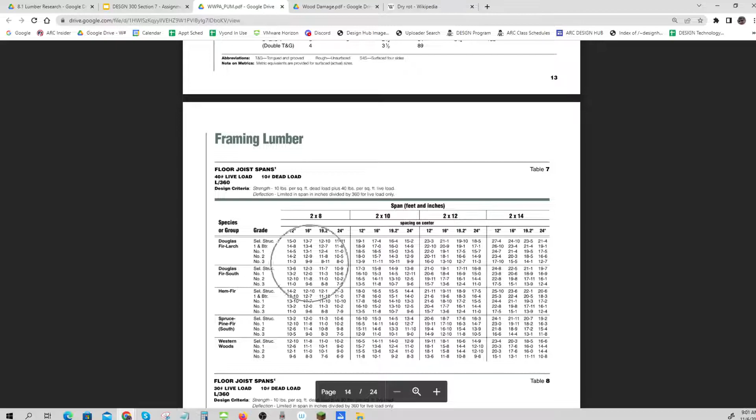Here's some mechanical properties that help answer a question, but there's even more information about this. And here are some charts. So this is the strength of the lumber. And then there's all these adjustments and this and that that we're not going to get into. We're not going to look at all this. But here are some, again, some framing lumber, timbers, more about that. Here's joists. Okay, so there's a lot in this product use manual.

There are some quicker ways to get to it. This lumber design values tells you, it's pulled out from there and it tells you what some of those things are about. Dimension lumber by species. This tells you about each different species and what it looks like when you're looking at dimension lumber and what some of those splits and things look like. It's really, really good knowledge.

And then there's lumber sizes if you're interested in just knowing how big things are. And that's really important because when you say a 2x4, it's not 2 inches by 4 inches. It's milled to 1.5 by 3.5. Okay, and you can see that these ones are basically 1/2 inch smaller up through 6. So 2, 3, 4, 6 are generally 1/2, and then the 8s are 3/4, 10s are 3/4, and 12s are 3/4 smaller.

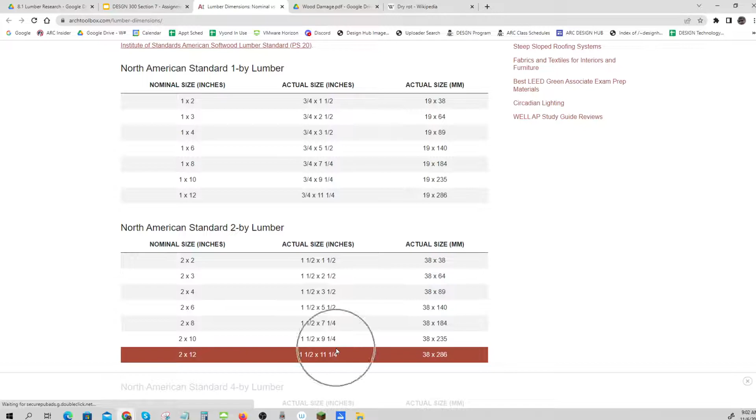Okay, so there's a little bit about what you're going to do in here. And again, we're going to add images. Now, here's an interesting one: summarize the important strength properties. So you're going to want to read about those in the strength portion and just make a quick summary. You know, it's a page and a half, 2-3 pages long, and I'm looking for you to condense that and pick out the key components we're going to look at.

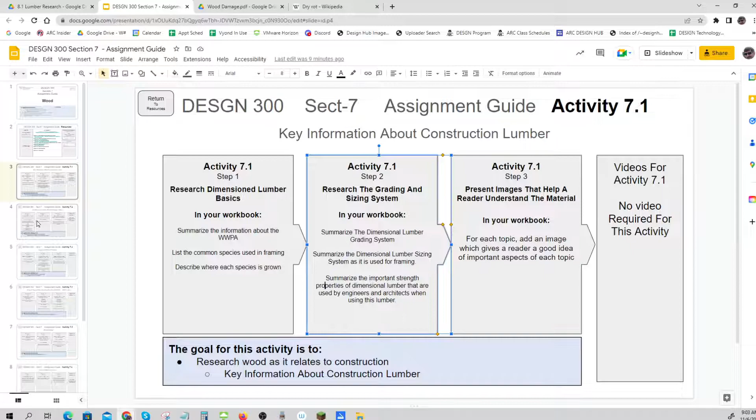In the next section, we're going to talk about dimension lumber and span charts. So here again are the lumber sizes, and here are some wood strength charts. So these are the design values, and mostly in the table, I'll be asking you about extreme fiber stress in bending. Most structures in our area, with the compression we go so overboard. We put so many pieces of lumber in that we are far, far below the compressive limits. But that's so that we can put nails in at even increments.

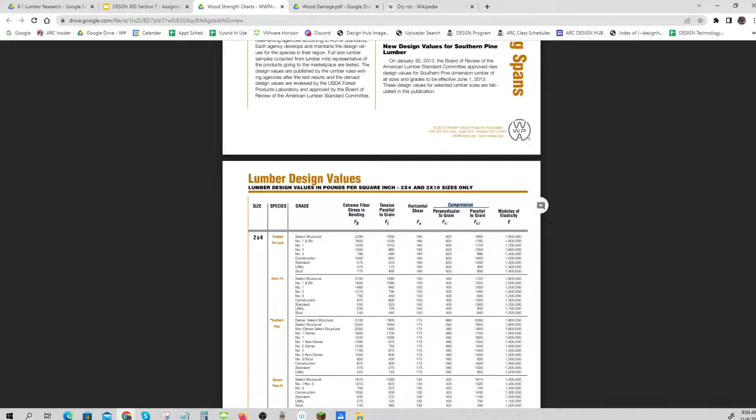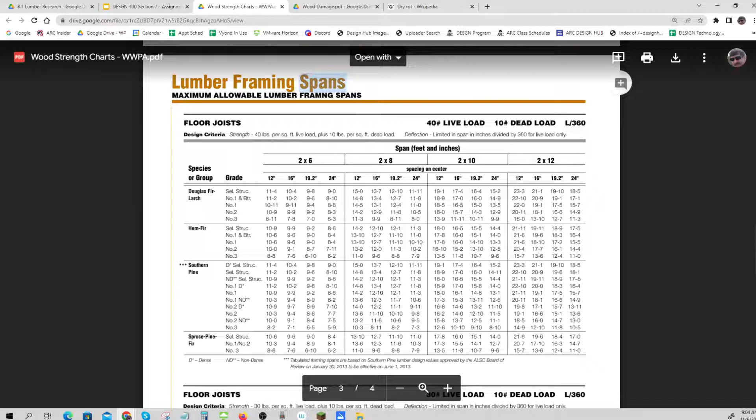But these bending stresses, that would be for a top plate, a sill plate, a joist, a rafter. Those ones are also important, so we want to know about those. And then there's how far apart can the piece span? How far apart between the ends? And the way you read this, I'm going to make it a little bit bigger for you. This number here that you see down here is the span in feet and inches. So this is 11 feet 4 inches, 9 feet 9 inches, 15 feet 1 inch.

And you pick the species, the grade, and then how far apart the joists are: 12 inches on center, 16 inches on center, 19.2, 24, and then what size lumber you're using. So with all that together, you have a standard span that you can use. So the joists have to sit on supports that are no more than 10 foot 2 apart, as an example.

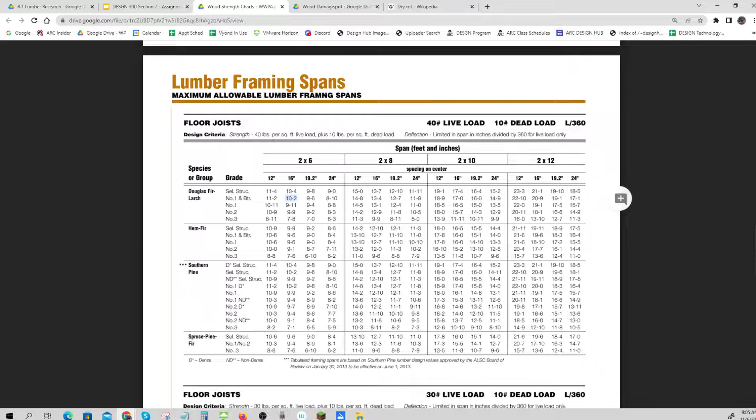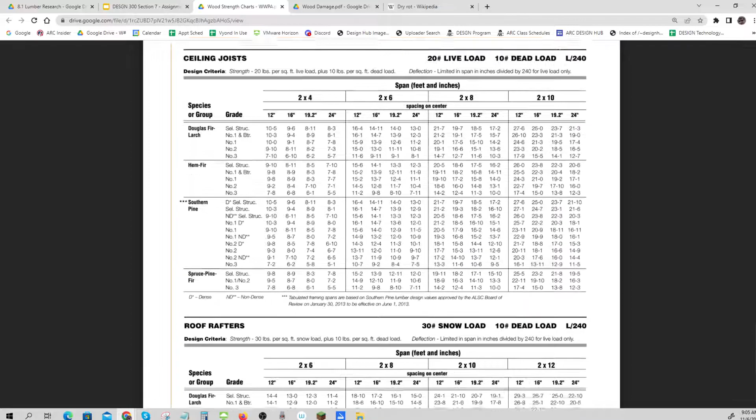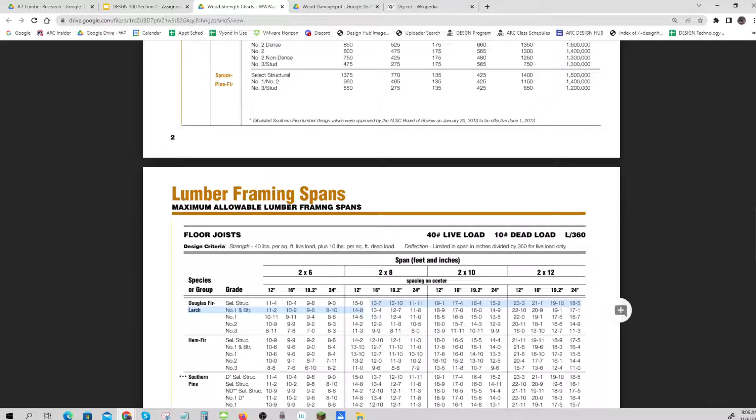So these are for floor joists, but they also work for other joists too. Ceiling joists have their own, and roof rafters have their own. And this one is for, like, a snow load and a dead load. Okay, so that's how you read these, and you'll be asked to do that. So remember, you look up the type of wood, the species, the grade, the size, how far apart they're spaced, how far between the joists, and this number here is the span, how far apart the ends of the joist are. How long can the joist be?

Okay, so you'll be asked to fill out a table about that and then put in some things, and you'll be asked to compare some bending. And this is an interesting one. It's a little counterintuitive. So, as an example, usually the bending stress for a 2x4 is stronger than the bending stress for a 2x10. Now, that doesn't mean it can carry more of a load. Because this is bigger, it has a bigger area. It can still carry more load, but the actual stress, pounds per square inch of the material, is less.

And it's counterintuitive. There's some information about it. But what it boils down to is you can't see inside to see all the defects on a 2x10, whereas in a 2x4, you can pretty much see the defects. So they derate it just in case there might be extras.

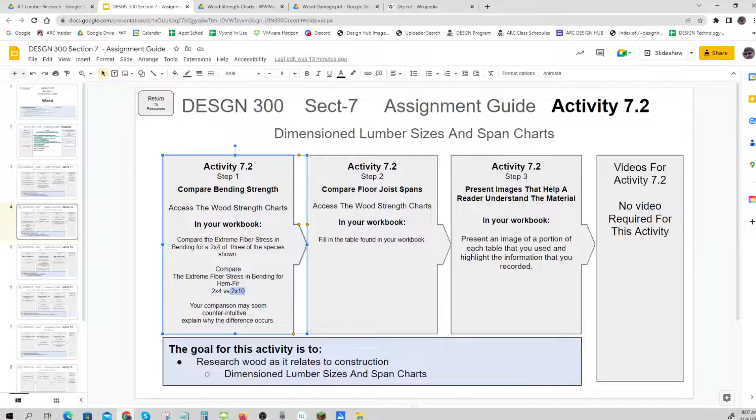And then in 7.3, instead of 2x4s and 2x6s, we're going to look at a special thing called an engineered wood product, and we're going to talk about joists. And you'll get a chance to see what they look like, but here's what an engineered product joist is. There's a piece of engineered wood board that's thin and up and down, and then there's some laminated wood on the top and bottom, and that fits into a slot.

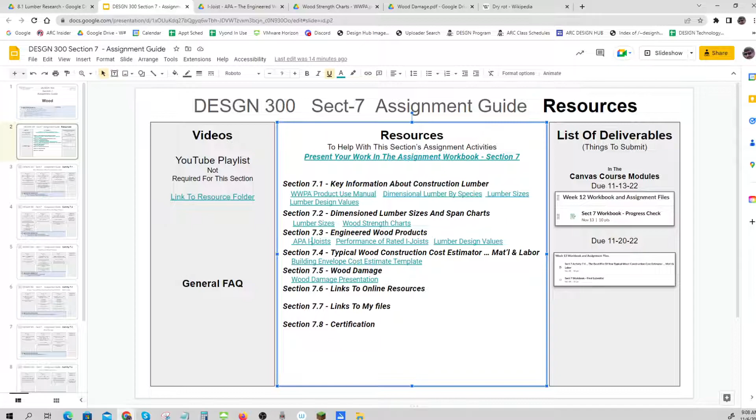And we know from mechanics that long and thin and tall is very strong. It would be very weak in this crosswise direction, but incredibly strong in this up and down direction. So this is a way to get good strength using less wood. And so you're going to look at that a little bit and answer some questions. You're going to talk about some of the information, and then do a comparison of the tables and add some images. You're going to use the I-joist table and the dimensional lumber tables and just compare the two.

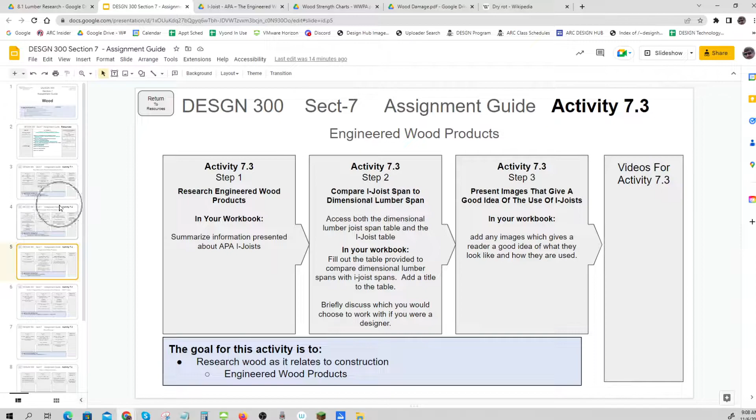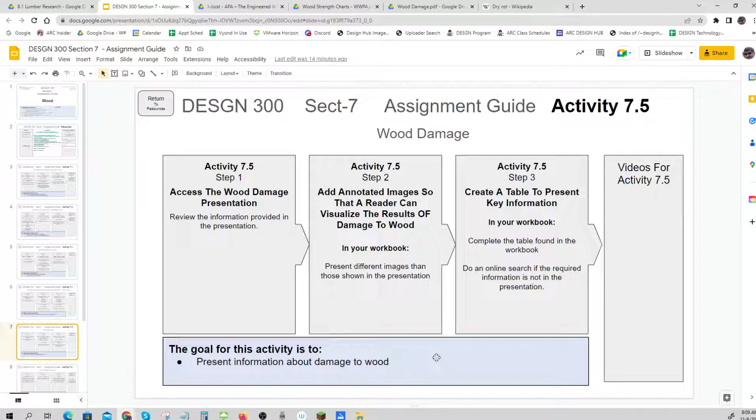In the second week of the unit, we'll talk about the labor and we'll talk about wood damage. So there we go. That is your overall summary for what we're going to do in the first week of the wood product research.